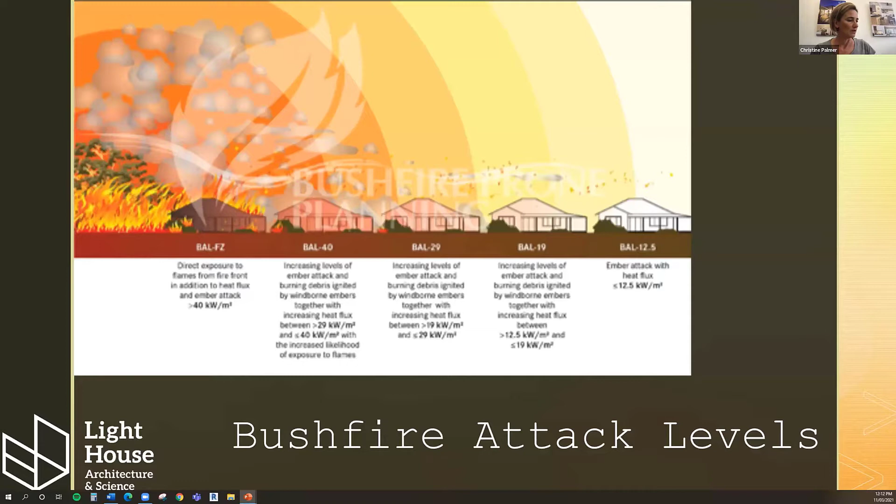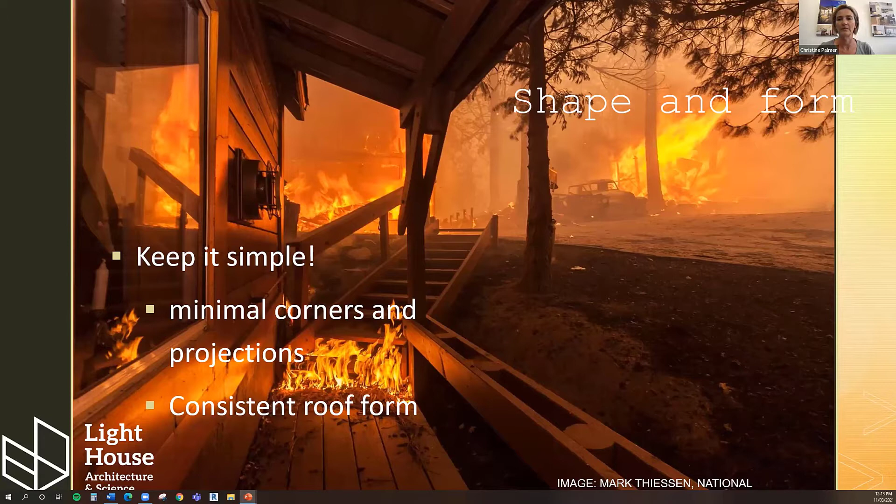So again, corners and projections out of roofs, out of walls, keep them minimal, and a roof form that is really simple as well. And if you've got a garage and/or sheds attached to the house, they should be under the same roof structure basically, and no different. Otherwise, keep them way away from the house.

Now, the main part of the structure, this goes through all the Australian standard construction of buildings in bushfire-prone areas, the construction requirements basically: roofs, floors, walls, decks, railings and exposed structure, cladding, windows and doors, details, gaps and joints are all the things that the standard covers and gives you a good outline of what's required for each of those elements when designing.

The other standard to get your head around, or to make sure of when you're looking at alternative solutions, is Australian Standard 1530.8.1, which is the methods for fire tests on building materials, components and structures, which specifically tests for bushfire attack, mainly radiant heat and small flaming sources. A lot of window manufacturers particularly, they've got BAL-rated windows that are tested through this standard.

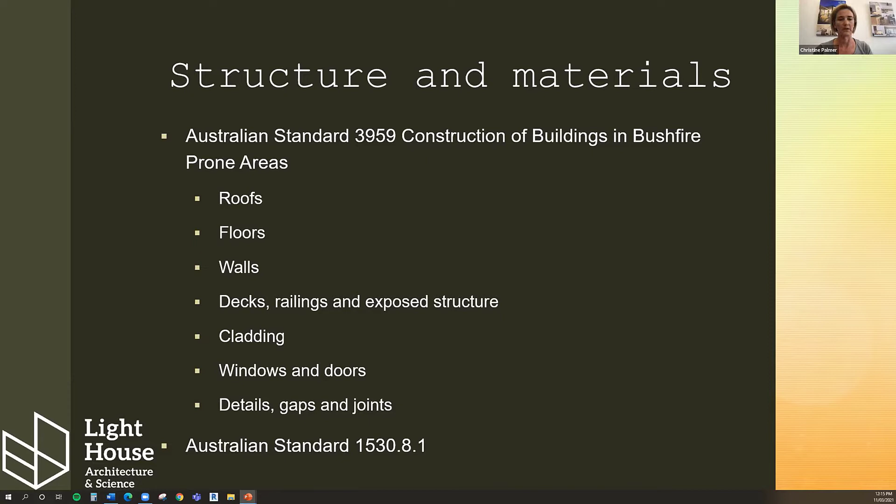So I'll just go through each of those elements, starting with roofs. Roofs, you're aiming to reduce the accumulation of flammable debris basically, and also wind-blown embers into the roof cavity. And through each of the BAL levels, you need to consider eaves, so avoid exposed rafters, boxing them in. Gutters need to be non-combustible and they need to be easy to clean, with a gutter guard, with specific ember and leaf guard products that you can buy and install.

Avoid skylights and other roof penetrations like air conditioners. And if you do have skylights, they need to be ember sealed using a non-combustible material. Corrugated steel is probably your best roofing. Tiles will let embers in unless they're really well sealed underneath.

And then, pergolas should be uncovered as well. Vines and fiberglass coverings, if you do have them, can be protected by a metal flywire cover if you really need to have them up there. But again, it's another thing that can burn on the outside, which will burn your house down.

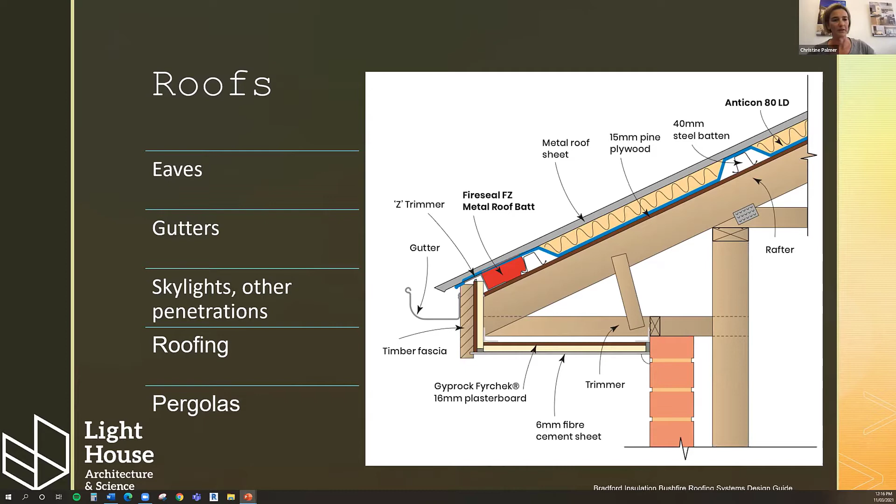Floors, generally there's the rule that if your floor is below 400 mil off the ground, it should be enclosed with a non-combustible material, and above 400 it doesn't need to be enclosed, because you're able to get in there, if you are defending the house, to spot for spot fires and things like that. It's easy enough to get in underneath, basically.

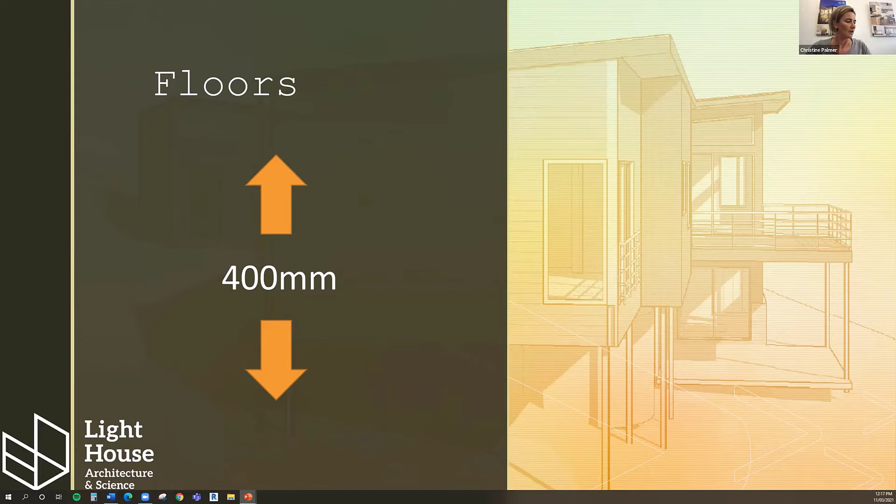But again, your floor structure and everything like that needs to be, depending on what BAL rating you've got, non-combustible, and you just need to go through that requirement for each of the BAL zones. Let me just check my notes.

Walls and roof structure, generally your framing is either going to be timber or steel. Both aren't great. Timber will burn and steel will warp. So it's one or the other, and you don't have any other options really, unless using earth walls or anything like that.

Insulation will help prevent ignition within the wall cavity, and also in the roof cavity as well. And the shape and cladding and detailing on the outside will protect your walls, and that's what you've got to think about: cladding on the outside will give you the best protection of the internal walls inside.

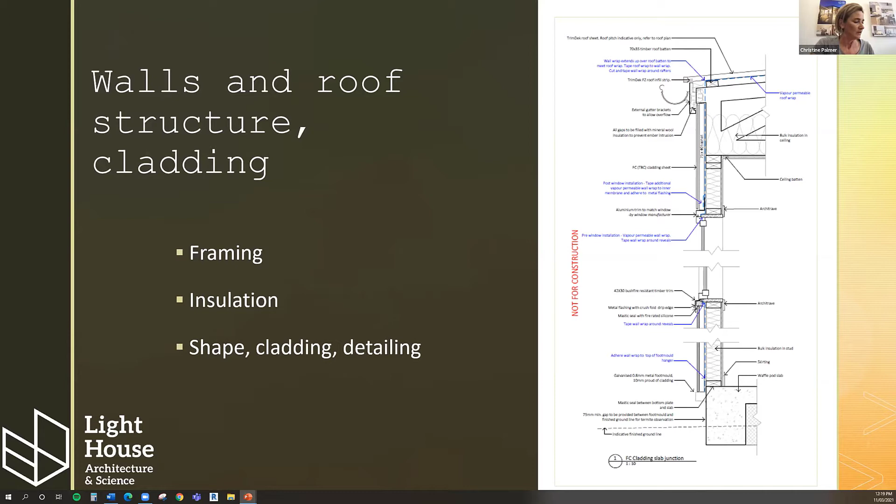Cladding, you need to use non-combustible materials like masonry, concrete, earth walls. Steel and aluminium are okay, but they can distort and transfer heat inside. And avoid rough-cut timber, because that'll collect all the embers flying around and is susceptible to burning. Joints need to be sealed or overlapped, backed or butt jointed.

With decks, railings and exposed structure, you can use fire resistant timbers up to BAL 29. And then BAL 40 and flame zone, they have to be non-combustible. You need to seal all your gaps again, and the posts need to be either non-combustible or fire resistant. Fire resistant timbers are outlined in the standard, and they include things like blackbutt, spotted gum, red ironbark, and there's a number of other ones there that are considered fire resistant.

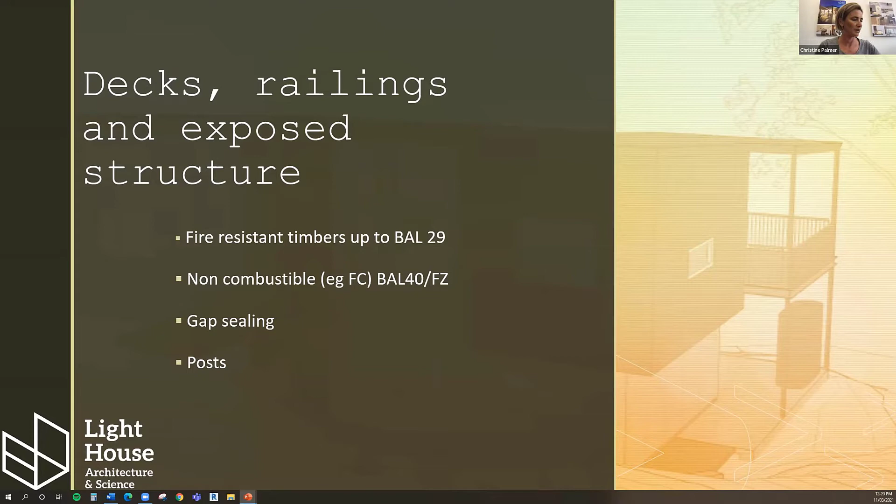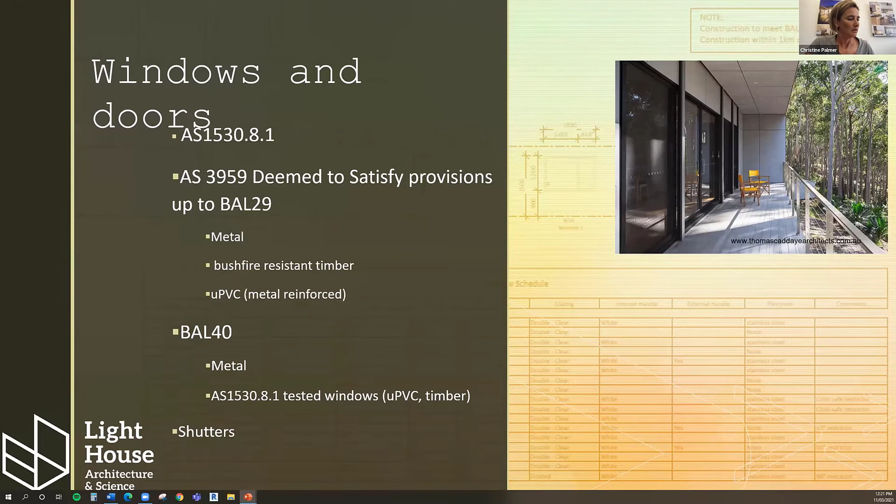that you can use. And also shutters, which need to be able to be manually let down, as if the power goes out, then you're stuffed. Tom's windows there, they've got shutters on them, and that house was completely closed up during the Rosedale fires. So, okay.

Vents and weep holes, joints and other gaps. The photo there shows a vent cover. Those holes can't be any bigger than 2 millimeters. And the other photo there shows just a gutter covering mesh, which keeps out the leaves and embers getting in underneath the sheeting there.

Joints need to be backed with a breathable sarking or mesh, and doors and windows need to be obviously shielded by either screens or the shutters that I spoke about before. They should also have draft excluders, and windows that are conformant with AS 2047 will satisfy the requirement for gap protection as well. Section 3.6 of the bushfire standard goes into details on that. Window weep holes don't need to be shielded.

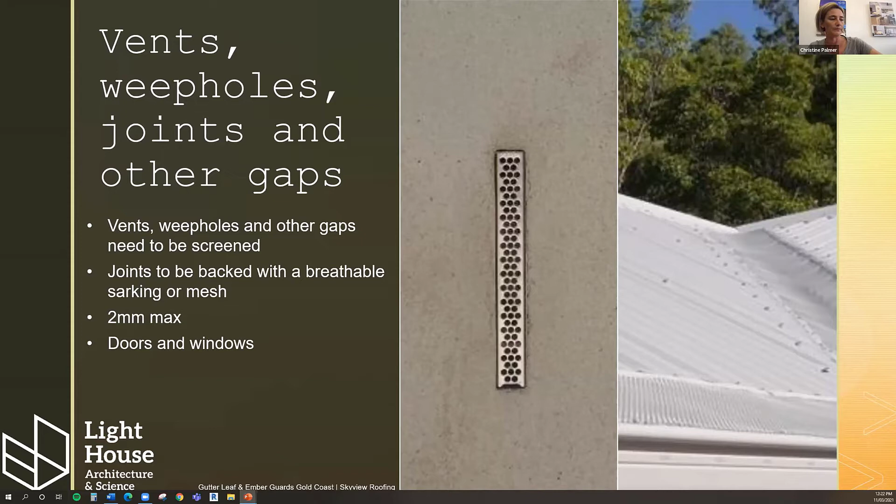The other thing we threw in was a note about fences and how they can provide some shielding in an urban context. But when you're considering putting fencing up, they should either be solid steel or hardwood. Solid steel is probably preferable, but many houses do survive a fire front very easily, but it's the stuff that's left burning around, like fences and bushes too close and trees, and mainly bushes on the ground, that will cause the house to burn down later on, many hours later, because that's still burning and causing problems towards the house.

And also keeping clear your protection zone around the house is really important. As Jeff was saying, it's not just the way the house is built, it's what's around the house that will at least help the house survive a bushfire.

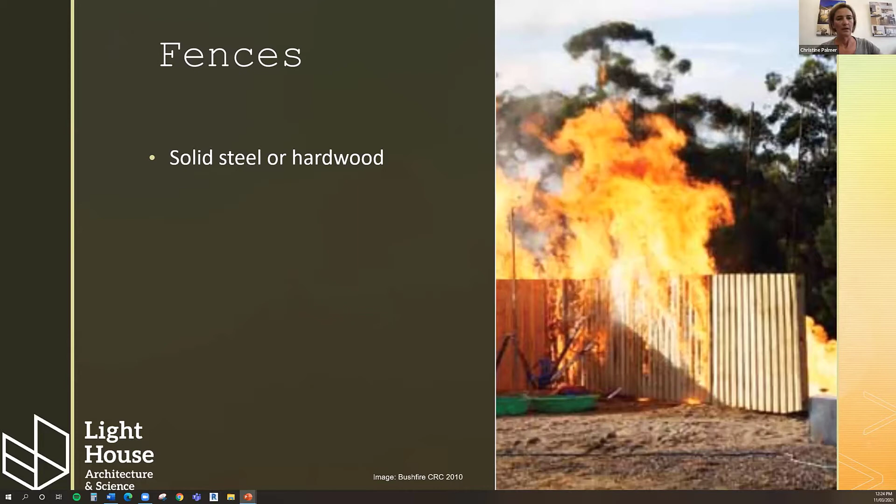And the last one I want to talk about, I love this photo that I found of these gas bottles with a fire burning in the background. The firefighters apparently turned up and just didn't know if they were full or empty. I think if I was a firefighter turning up to that, I'd be like, I'm walking away from this house. So that's just not great. So when you're considering where water and gas is going in, gas particularly, councils will have their own specifications about where gas bottles should be stored, and you need to check that. But they need to be kept away from the house, particularly in your flame zone or BAL 40. There'll be specific requirements about that.

There's a need to use, I think it's steel or copper piping. With your water, you need to make sure you're using steel or concrete water tanks. Then in the higher BAL ratings, and council requirements, you need a specific firefighting water tank, which is not to be used for anything else. You can also consider sprinkler systems, which are not to be relied on, obviously, because they'll need their own diesel pump, and water doesn't last long when it's being sprayed to that extent you can see in the photos. So that's another consideration.

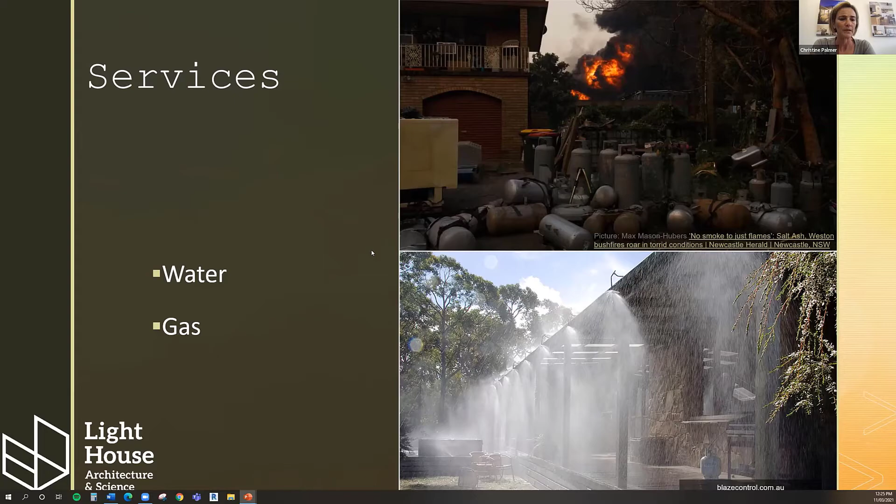I'll hand over to Tom now, and then I'll take some questions later.

So I'm going to talk about a house as a case study for building in a bushfire-prone area, and particularly building in flame zone. The house is predominantly a flame zone house, but we did manage to get one elevation reduced to BAL 40. And that's because it was facing a neighbouring developed site, which was considered to be managed land. So it's a good example to look at, because not only was it relatively recently completed and built to flame zone, but it was also put to the test in the Black Summer bushfires, when the fires came through Rosedale and destroyed much of North Rosedale.

And so it tells quite a good story about how we approach the design and construction for flame zone, but also how it fared in the fires afterwards. So I'll just talk a little bit about the site and the house, and then give a quick run through the construction using some images that were taken throughout the process.

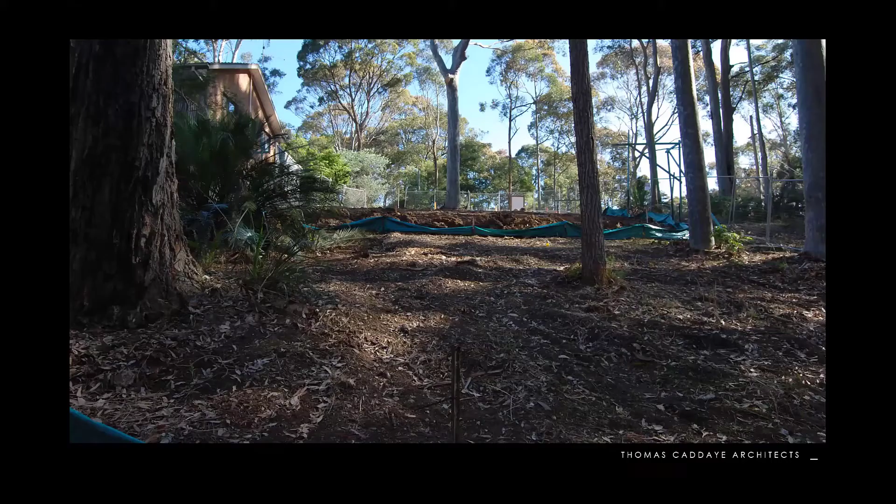So this was the site once it was prepared as an APZ. The whole site was an inner asset protection zone, which allowed us to keep no more than 15% canopy cover for the trees, but that still allowed us to keep the major trees on the site. Looking down the site, once we hit the nature reserve at the bottom, that was just unmanaged land in its natural condition. That was the fire threat, but it also made it feel like we were still in a forested area.

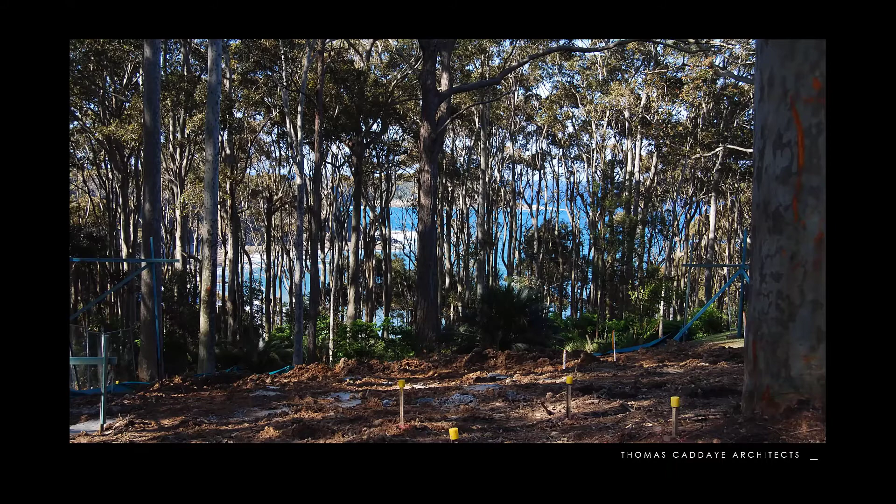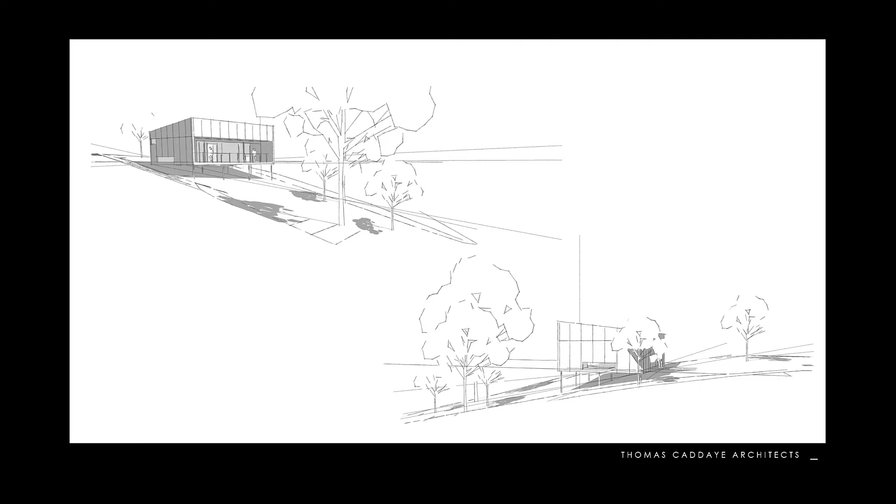So the house, when completed, held that contained form, and a lot of the neighbours had things to say about the look of it and how enclosed it was.

I think it's our responsibility as architects to work to the Australian standard, which has all the information we need, but within that, make sure we're still creating delightful spaces that we want to be in, not just dark enclosed bunkers.

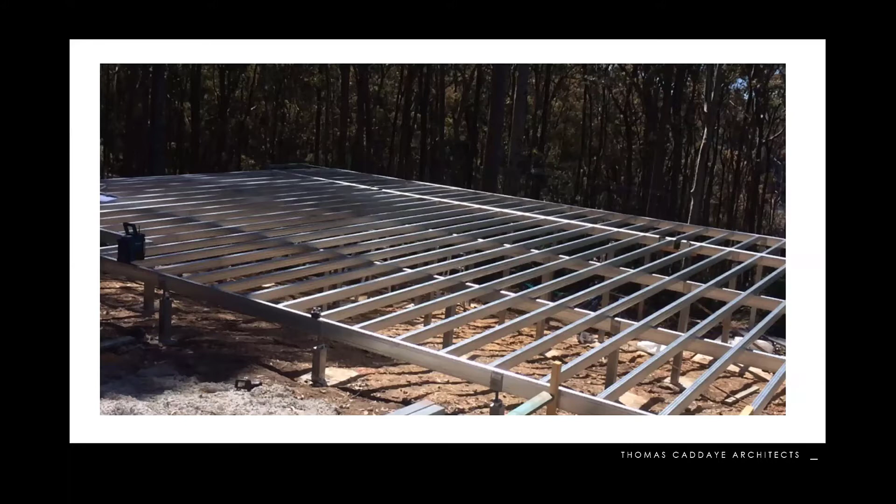Moving through, the floor structure for this was kept really simple, as it's a very modest budget we're working with. This was one of the off-the-shelf Spantec flooring systems, just light gauge steel floor framing, which goes up really quickly, is very economical, and perfect for a simple house like this one.

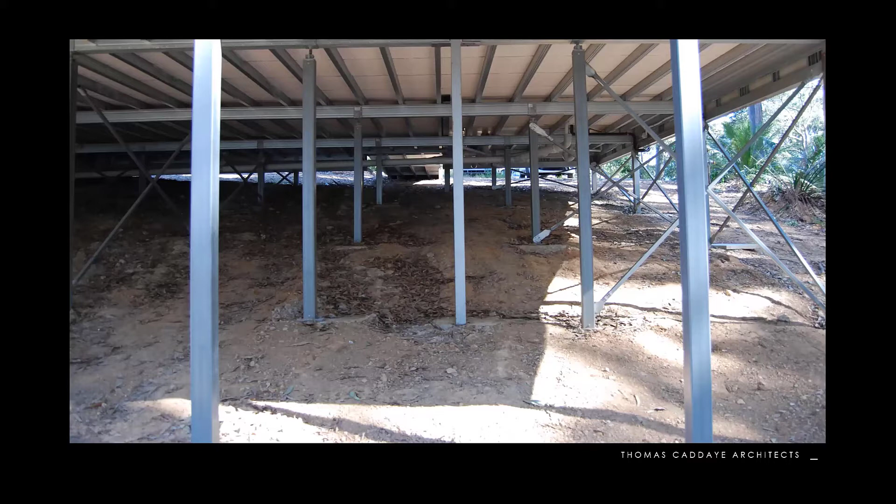On top of that we have Hebel flooring, just 75mm thick Hebel power floor. That dealt with our non-combustible subfloor for the flame zone requirements, light gauge steel flooring and Hebel planks over the top. Very economical stuff so far.

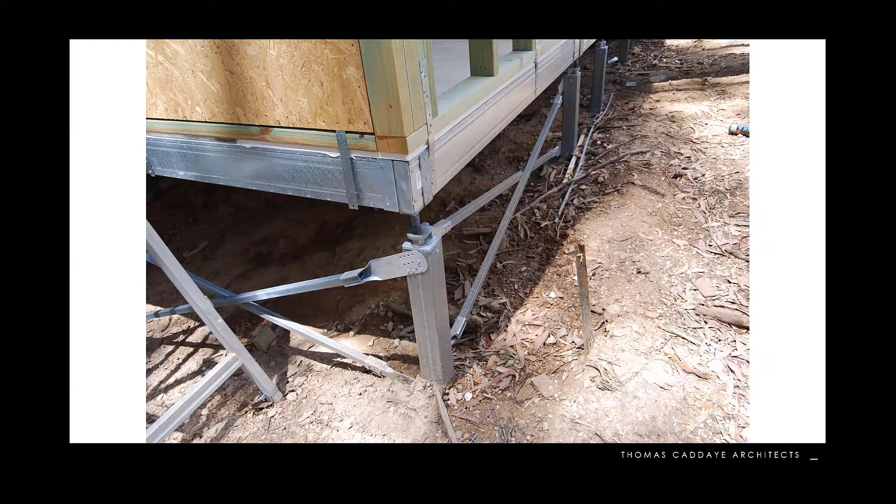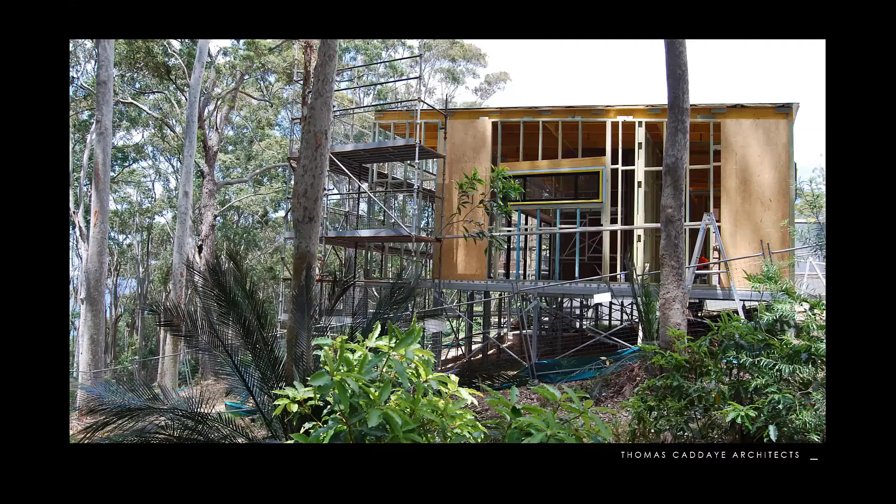This is a good detail showing a section through what we ended up with: steel subfloor, Hebel over the top, and from then on we're allowed to do a standard timber frame structure before wrapping it in non-combustible materials. So it's starting to look like a standard timber framed house, with a slightly thicker stud, but nothing too tricky so far.

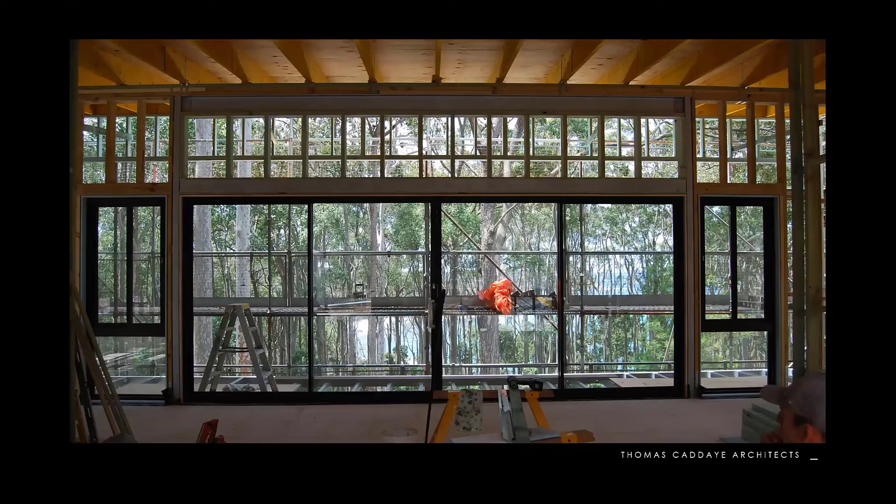This image shows the requirements for the flame zone. We've got the roof purlins there, and over the top, like Christine showed in that roof detail before, 15mm ply has to go over the roof before you put the metal roofing on top. You can also see ply on the ceiling and Hebel on the floor, which gives us our flame zone enclosure.

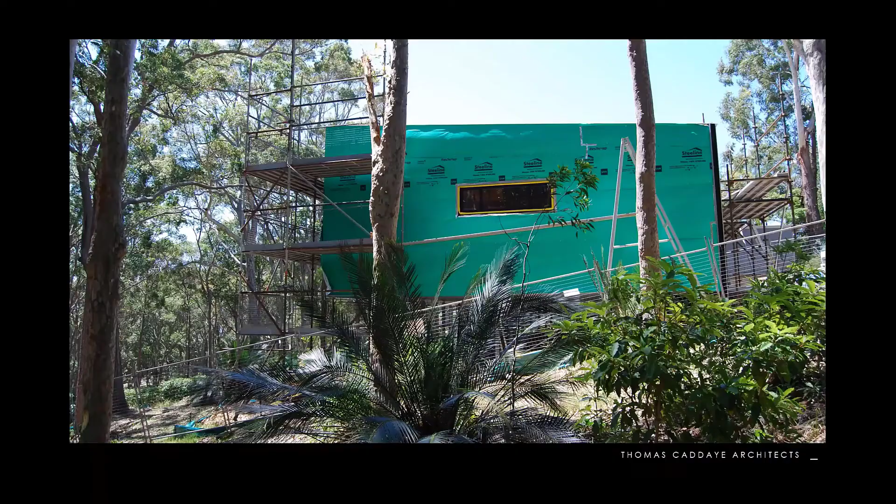Then just wrapped up as you would normally do. We constructed the wall to be the tested system of the James Hardie boundary wall system, which gave us our fire resistance level that was needed.

Instead of the standard 6mm cladding that's part of the boundary wall system, we switched it to 9mm. This was CSR Barestone, but that's obviously upping the FRL of the wall once we switched to 9mm, and then just attached using the standard factory CSR system.

Then over the top of the windows, we elected to go for shutters. We were given a concession in this project by the Rural Fire Service. Instead of using flame zone windows or flame zone shutters, we put an argument forward, and they allowed us to use BAL 40 windows with BAL 40 shutters over the top. We tried to do that again recently and we couldn't, because their claim is now that there are enough flame zone shutters readily available on the market.

But you can see here also us using a detail where we're trying to conceal the shutters up into the soffit above, so they rolled up away and just slid out of a slot up against the cladding.

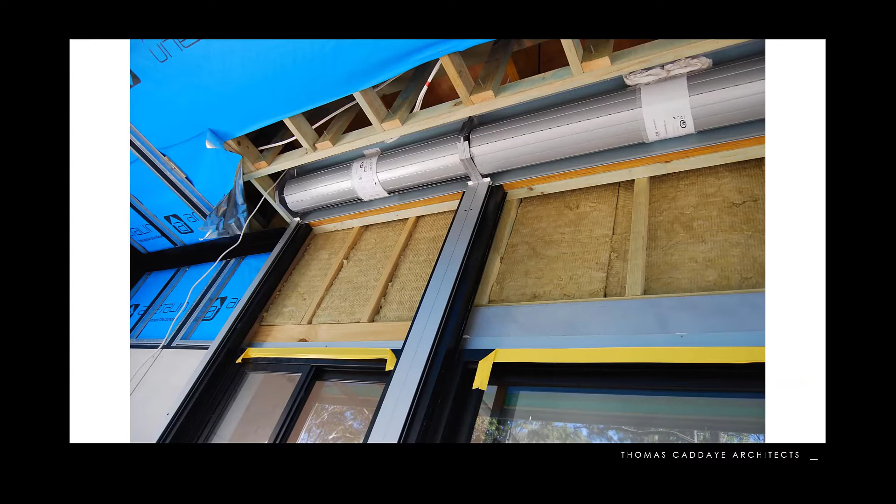In order for us to try and make it seem simple on the outside, and all the pieces just going together.

You can see the tracks going on where the roller shutters will run down over the windows, and with the cladding, that is just still the standard CSR system on the metal furring channels, and the sarking behind.

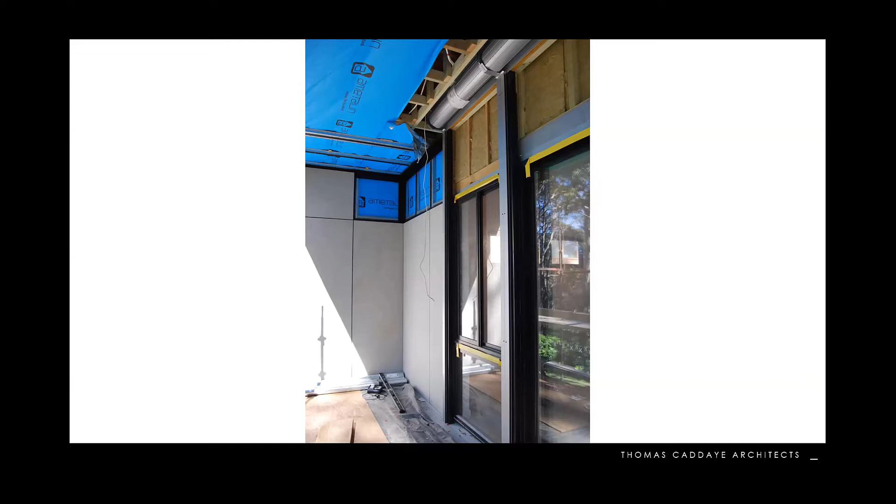For the roller shutters on the other windows, we just accepted face fixing the head boxes, and being quite honest about them. They weren't very big, and in the end, they weren't very obtrusive.

That's the image that Christine's already shown you before, but just that effect of trying to make it look like a nice wall of glass without having too much bushfire paraphernalia stuck to it.

Decking here is fibre cement decking board, and there's a few of those on the market now. And handrails, obviously, just stainless steel. You could also use aluminium.

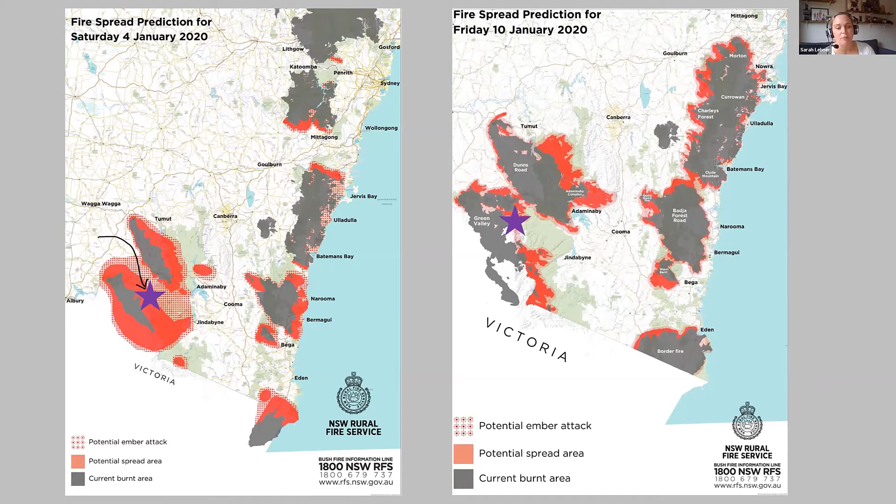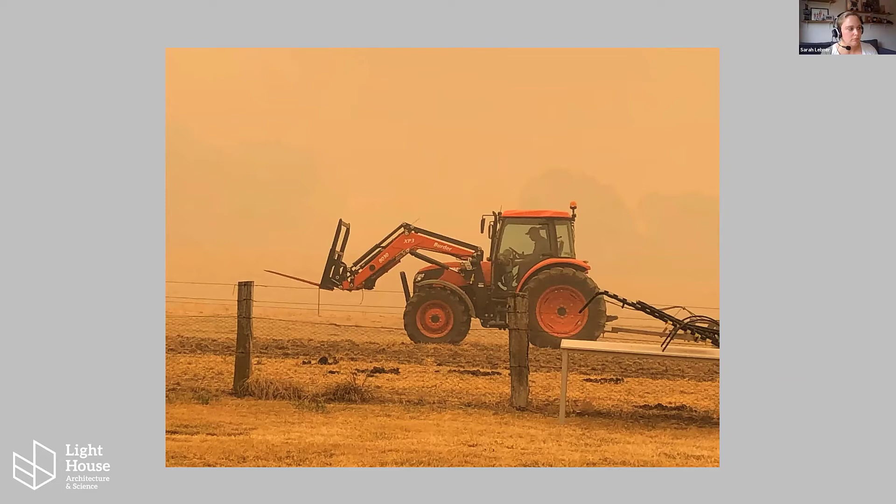I'd always grown up aware that community education around bushfire plans and making the decision to defend and how to do it had increased dramatically in recent years. It's gotten a lot better, and I think the low death toll this summer has been a testament to that. But as a designer, I returned to work and realised there was no design discussion about designing for active defence.

That's where my interest in contributing to this practice note was piqued. I should say I'd really encourage everyone to get the full practice note, because what we're trying to do today is just summarise bits of it off the top of our head, but it's a much more considered and eloquent document than perhaps what we're saying here.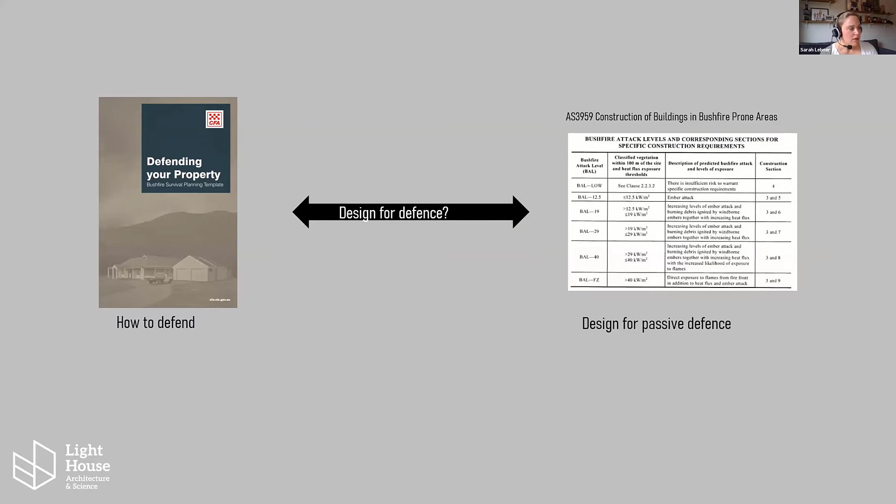I fully understand that designing for defence has to be a really delicately handled thing. Jeff has really helped me appreciate that it's not a matter of having a set stance as a homeowner, but a decision that has to be assessed on every threat day based on the conditions and your physical and mental capabilities. But just like we've learned that's not enough of a reason to not educate people on how to do it, I don't think it's a good enough reason to not consider it in design.

By studying primarily these three resources, the CFA Defending Your Property book, the AS3959 standard, and also this book, Essential Bushfire Safety Tips by Joan Webster, we've developed a list of 12 fairly straightforward considerations that could supplement AS3959 from a designer's perspective.

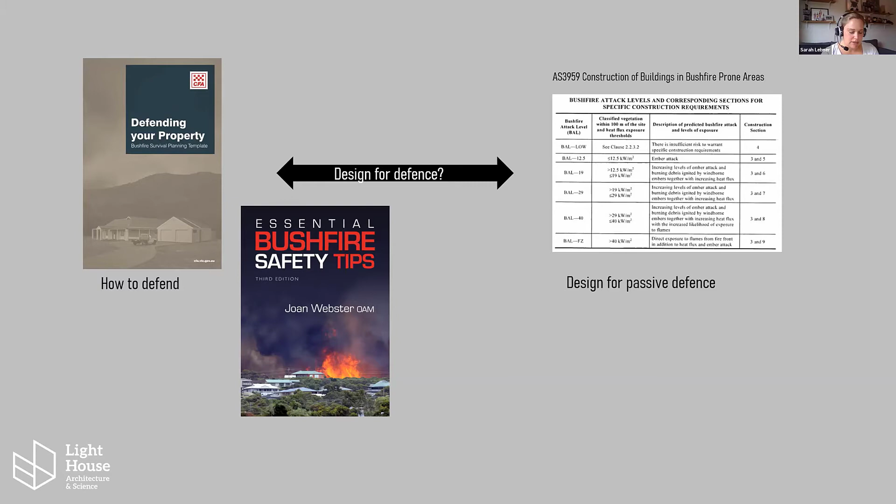Firstly, designated indoor and outdoor storage locations for protective gear, communications equipment and firefighting equipment. You need a lot of stuff to be prepared to defend your home, and you need to access it quickly rather than rummaging through the back of a shed where it's been put as an afterthought.

Similarly, survival kits should be located on the leeward side of the house and in a well insulated and sealed location.

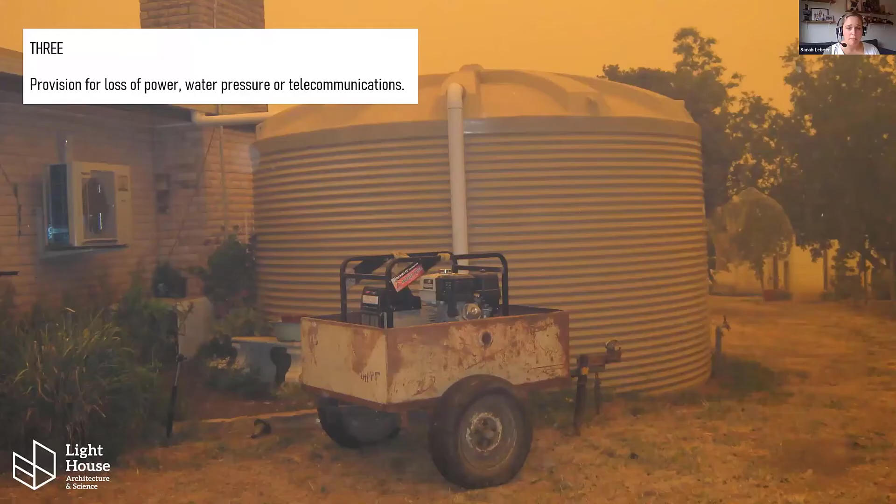Mum and Dad ended up without power for 23 days. This is Dad's fairly basic setup, and I imagine with a little bit of planning it would be quite easy to have a protected location for a generator that's very easily connected to the water pump and essential services.

Similarly, they had no landline or mobile reception for a good portion of time. Neighbours had satellite internet, and that was at least how I could see what roads were open to leave. But these days, as we're moving more towards mobile only in homes, it's worth just questioning that in a bushfire prone area and having as many options as possible.

As designers, when we're having that discussion about taps, how you're going to water the garden, how you're going to wash the car, you can also bring in that consideration of how you're going to access all the areas that you're planning to defend with that hose system.

And when a front is actually passing through your building, you need to be sheltering, observing and defending from inside the home. So that means you want somewhere that you can easily fill buckets and easily fit a hose. So bathtubs, big laundry tubs, easily accessible hose fittings inside can all help with that.

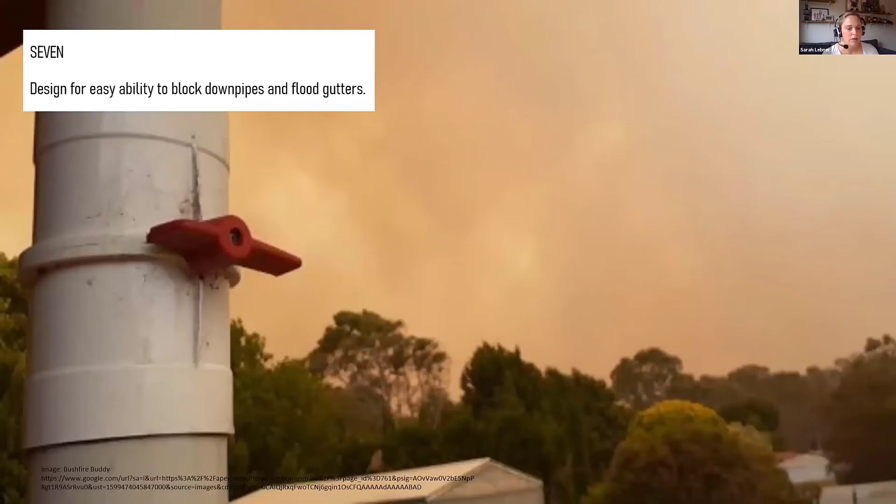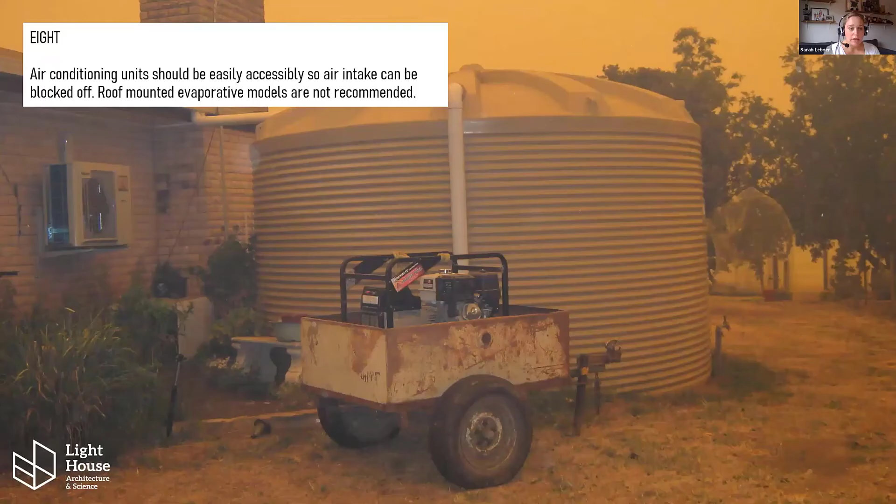There was some amusing talkback radio during the fires about people's attempts to block downpipes. And my husband also said it was a bit trickier and more time consuming than he had thought it would be to block Mum and Dad's. So there's some really clever products around these days that facilitate that very quick blocking of a downpipe. Air intakes need to be blocked off. So putting AC units somewhere that you can access to do that is a positive.

And we do tend to focus on human life in our legislation, but we can keep our clients safe by including consideration for them attempting to keep their pets safe and out of the way to avoid causing a mayhem situation while they're all inside.

When you are defending your property as that front is passing through, you're meant to shelter in rooms with 2 or more exits, and that can include a window that you can get out of. And you're meant to be able to observe what's happening on all sides. So this is one of Clare Cousins' clever designs, which was selected for the Bushfire Home Service after the Black Saturday fires. And, rightfully so for thermal reasons, it considered limiting east and west windows. But that's not so great for active defence and surveillance.

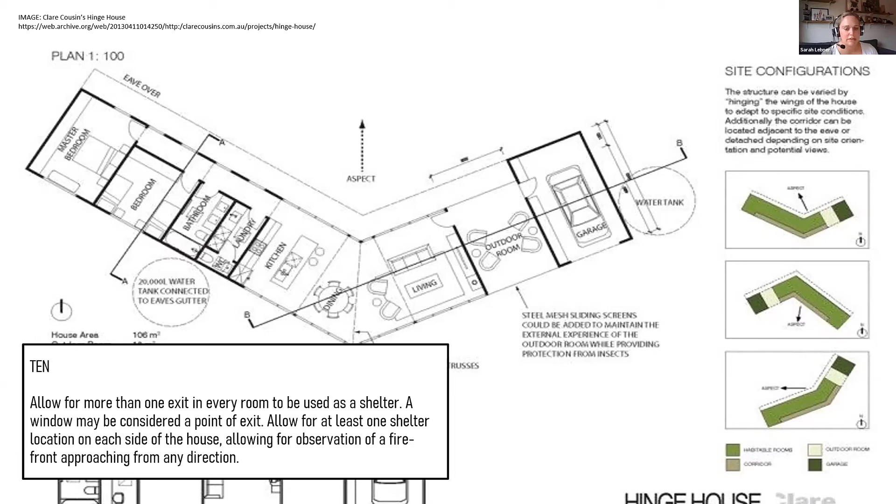And similarly, you need to design to allow movement from one end of the house to another through those rooms with 2 or more exits, and preferably to allow for zoning between areas, preferably with solid hinge doors. And also the ability to move furniture away from windows while maintaining safe access between rooms is worth considering.

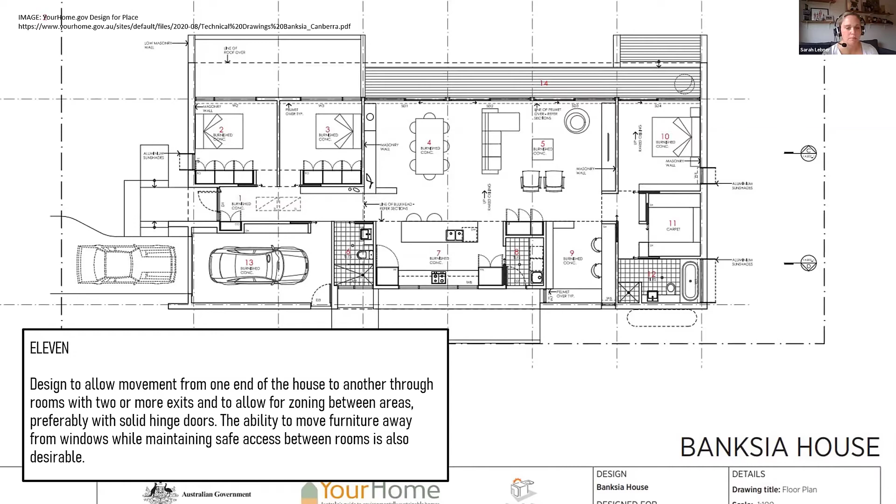And if there is a ceiling cavity, it's good to provide access that is sufficient to monitor the whole space. So as homes get bigger, this is quite an important one. Ideally where you can leave a ladder set up that's not in the way, and ideally near that hose connection point so that you could get a hose up there if you need to.

So I'm not suggesting that these would become some part of the legislation in bushfire prone areas. I'm simply suggesting that I think this is a good little list for designers to consider and discuss with clients and be viewed on balance with everything else that's going on in the project. And to make sure that people who may choose to defend can be supported to do so as effectively as possible by their home.

And it's not just people who may face a situation where they choose to stay, but research from the Bushfire Building Conference suggested that there's also a group of people who end up being unable to leave their house. So in some situations, considering these things can actually help them if they end up unexpectedly sheltering and defending in their home.

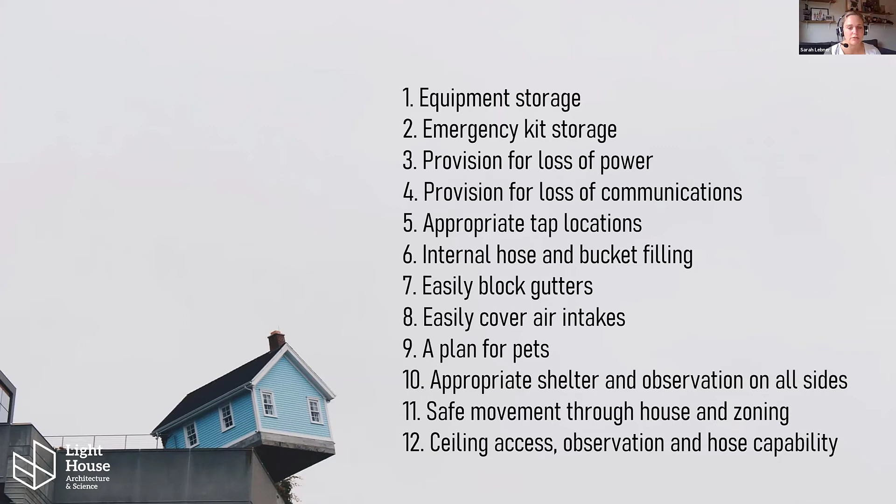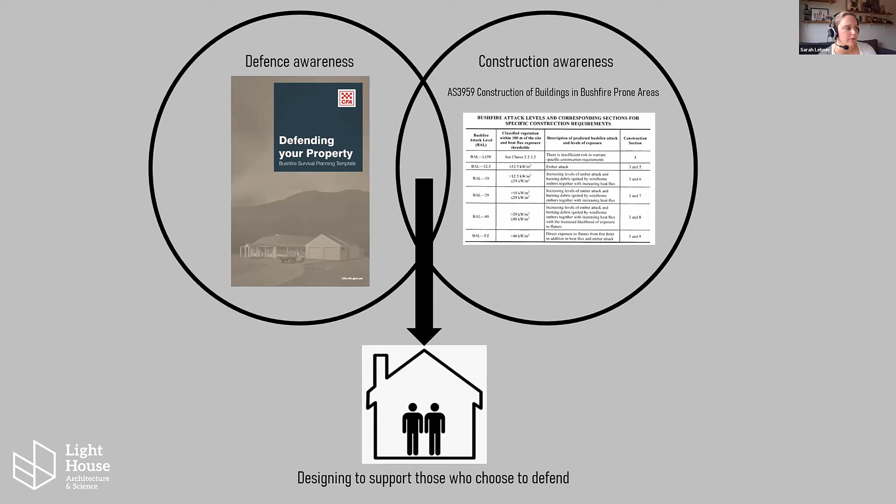It's really easy to say evacuate and evacuate early, but in farming communities, just asking people to leave their homes, you're asking them to leave their business and their livelihood, often built by generations before them, their country, hundreds of animals in their guardianship, not to mention the wildlife. And the other truth is that when state resources were spread so thin, it was those who made educated and prepared decisions to stay and defend who saved significant pockets of country in our area.

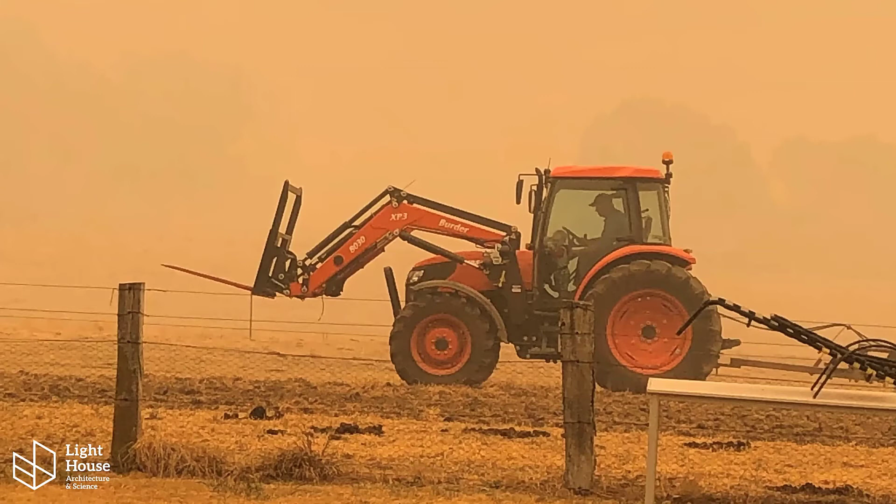The day I left, a community meeting had been called and they were told it was going to be so bad that even the local fire brigade was being evacuated. So Mum and Dad thought really heavily on that decision. They also had my husband there and his 2 brothers, both of whom had done CFA training in high school and worked on the summer crew, and whose own family home they had chosen to evacuate, and it unfortunately burnt days before. So together they all made this highly educated and prepared decision to stay. So I think we should consider designing homes that support people in making these educated decisions.